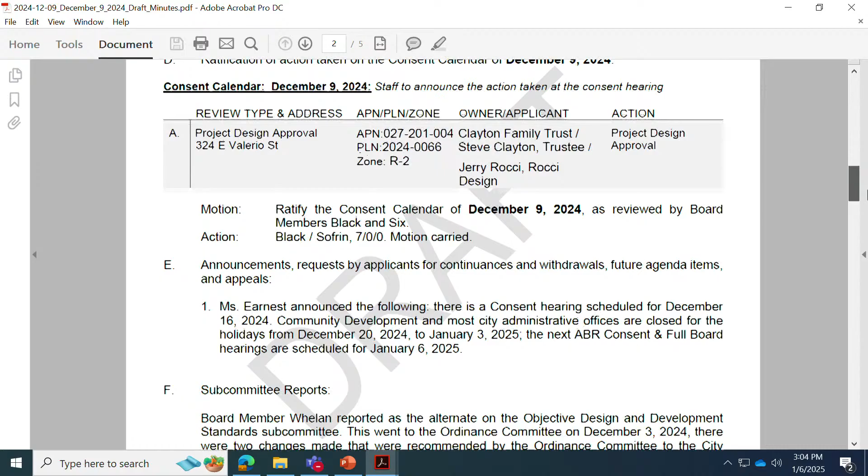I make a motion to approve. Second. Any discussion? Okay, let's take a vote. Chair Anderson? Yes. Board Member Anderson? Yes. Board Member Black? Yes. Board Member Six? Yes. Board Member Sofrin? Yes. Motion passes. Let's move on to item E, approval of the minutes from the consent meeting on December 9th.

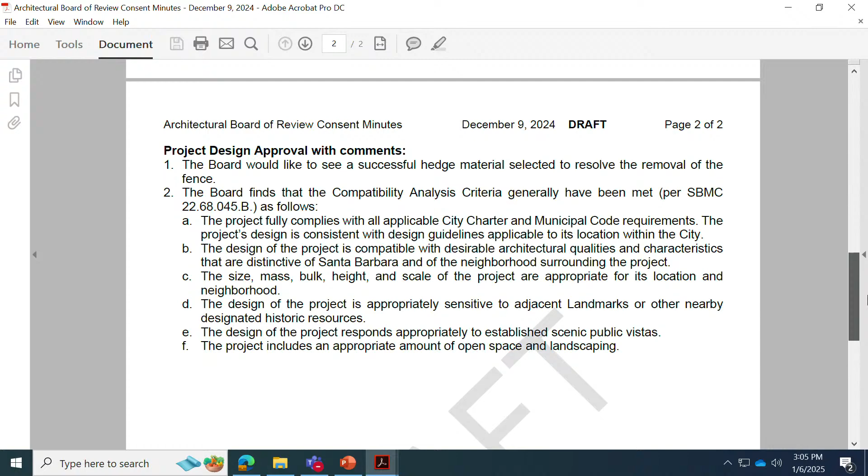Motion to approve. Second. Okay, let's take a vote. Chair Anderson? Yes. Board Member Anderson? Yes. Board Member Black? Yes. Board Member Six? Yes. Board Member Sofrin? Yes. Motion passes.

Item F, ratification of action item on the consent calendar of December 16th. Thank you, Chair Anderson. The items reviewed on December 16th were item A, 1298 Las Positas Road, which was continued indefinitely to consent, and item B, 2941 State Street, which received project design approval and final approval with the condition that the 4 windows with the 2 flanking casements shall have an internal middle mullion.

Okay, do we have a motion for ratification? Motion to approve. Second. Let's take a vote for the ratification. Chair Anderson? Yes. Board Member Anderson? Yes. Board Member Black? Yes. Board Member Six? Yes. Board Member Sofrin? Yes. Motion passes. Item G, any announcements, requests by applicants for continuances and withdrawals, future agenda items, or appeals?

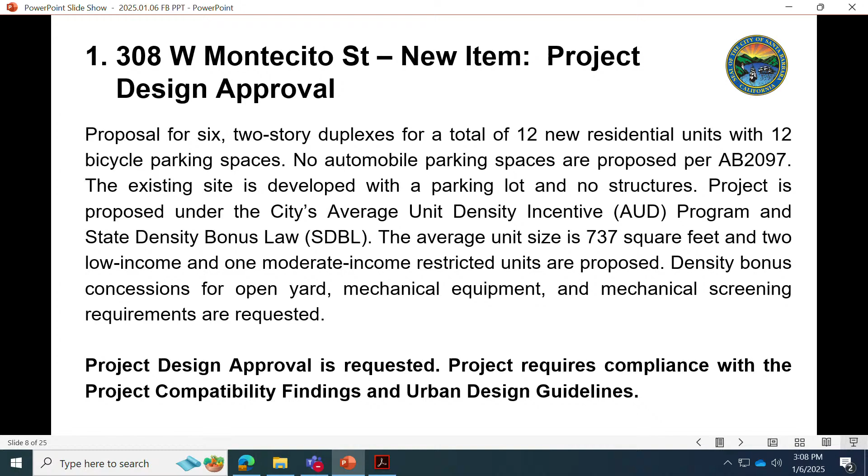Is the applicant here? A few staff comments before the applicant presents and introduces themselves. I'd also like to add a few things after we receive in-person public comment. But before the presentation, I'd just like to clarify that the project is here for project design approval. It was deemed complete, so it's ready for project design approval today.

There was a previous project approved at this site and the neighboring site, 302 and 308 West Montecito, approved by ABR and the Planning Commission for a 32-unit hotel. That application was allowed to remain active while the applicant explored housing on these 2 sites. But with them moving forward with these housing applications, they will be required to withdraw that application for the hotel project. I just wanted to clarify that. After the presentation and public comment, I can clarify the questions received in the public comment letter. Thank you.

Any questions from the board before we get going? Yeah, I have a question for the staff.

Given the makeup of this particular project and its roof, which is hipped roofs, is there any minimum requirement for area to be available for photovoltaic systems?

I will look into that during the presentation and answer that after.

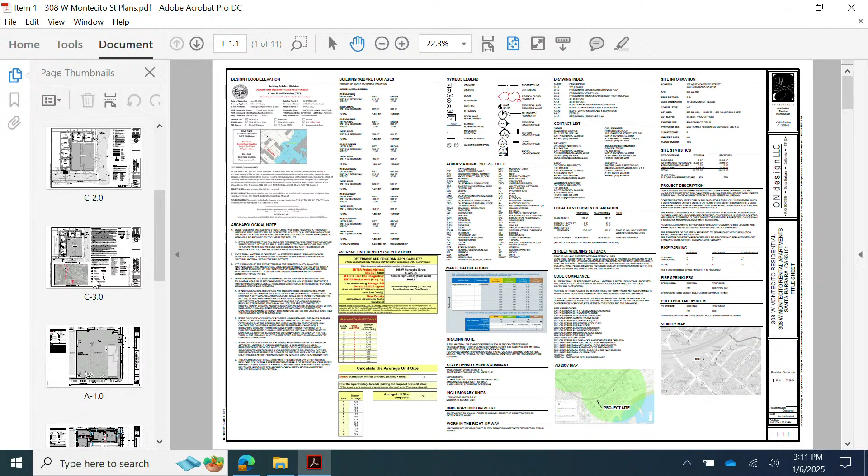So the subject property is 308 West Montecito. It is approximately a 10,000 square foot lot, in the shape of an L with frontages on West Montecito Street and on Bath Street. This corner property is 302 West Montecito Street, so that's not a part of this project.

Currently it's just developed as a parking lot. There are a few existing trees - a eucalyptus tree over here on this portion of the property, some palm trees along the Montecito Street frontage, and an existing street tree along the Bath Street frontage. And if you'll recall from the previous application, there are a few encroachments from the property to the north.

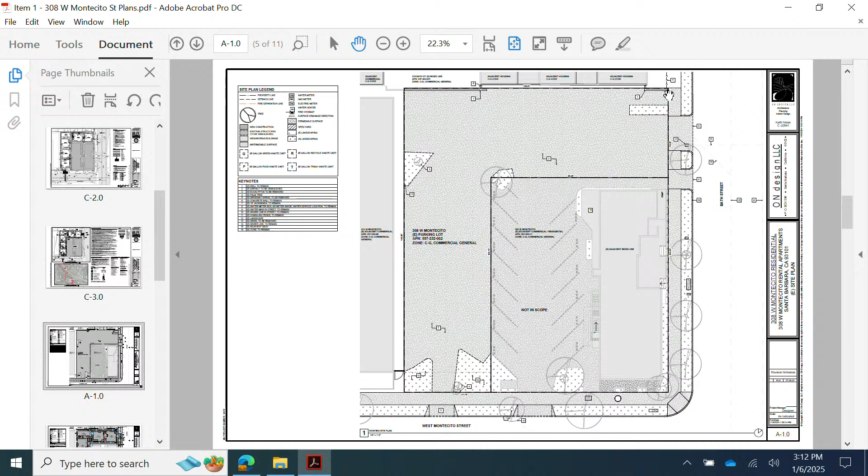Particularly, there are two wall elements and their dry utilities located on the subject property, not included in an easement area. So we are proposing to clear the site with the exception of those encroachments along the northerly property line and construct...

Did I hit something? I don't think I did. Sort of. There we go. I know.

They construct 6 duplexes. I would say the inspiration for this site was when we look at the neighborhood context, it's mostly 1 or 2 story structures. The structure to the north is 1 story. The structure to the west is also 1 story.

I'll point out on 302 West Montecito Street, there are 2 special accessory dwelling units proposed, so those are single story. 302 itself is 2 story. If you'll recall, across the street, 311 West Montecito, which was approved, that's 2 story. The commercial center next to it is also 2 story.

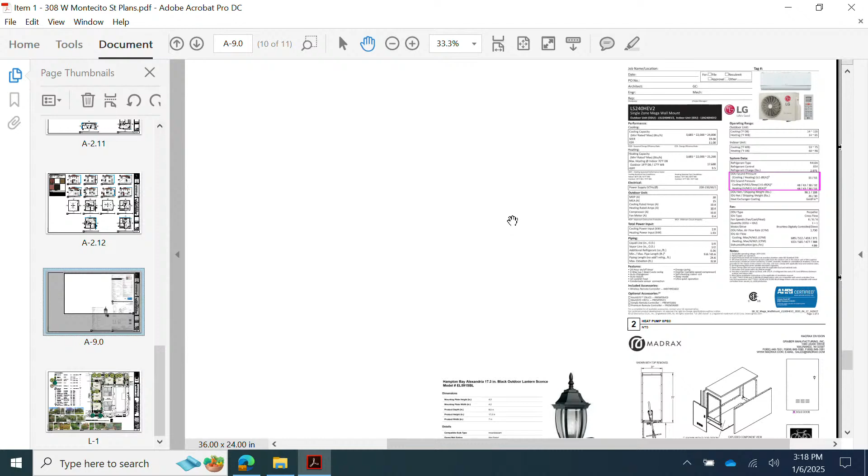Moving on, this is a spec sheet of what the bike lockers are, but they're inset in, so they're not prominent on the architecture. The proposed color is a bronze color to match the trim color on the architecture. And this is the light fixture proposed, found near each entry.

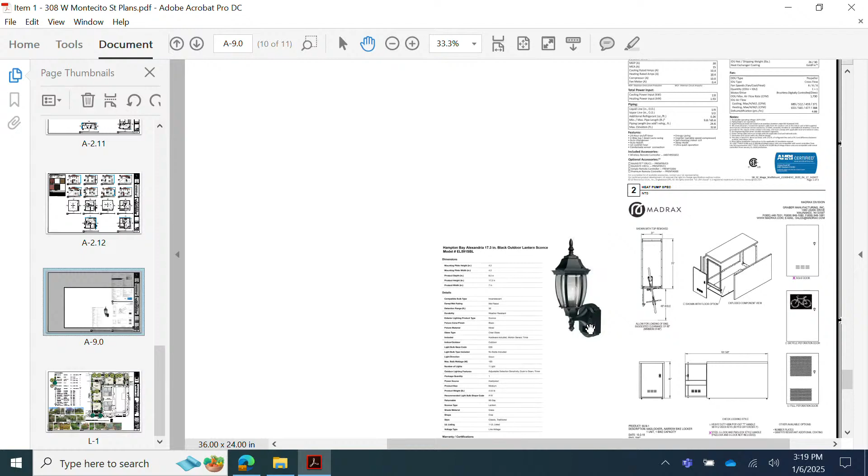Landscape-wise, it's a coastal palette, generally between the trees or between the buildings due to limited space. There are king palms proposed in an irregular pattern, with the exception of along the northerly property line, to comply with the city's highway ordinance. Those are Tristania trees to provide more canopy and screening and filtering of noise and air. In certain areas around the buildings, there are espalier calliandras proposed to provide some more vertical landscaping around the buildings.

Just scroll over the photos of the plant.

That's the general project. I don't know if we have photos that we can look at for the context.

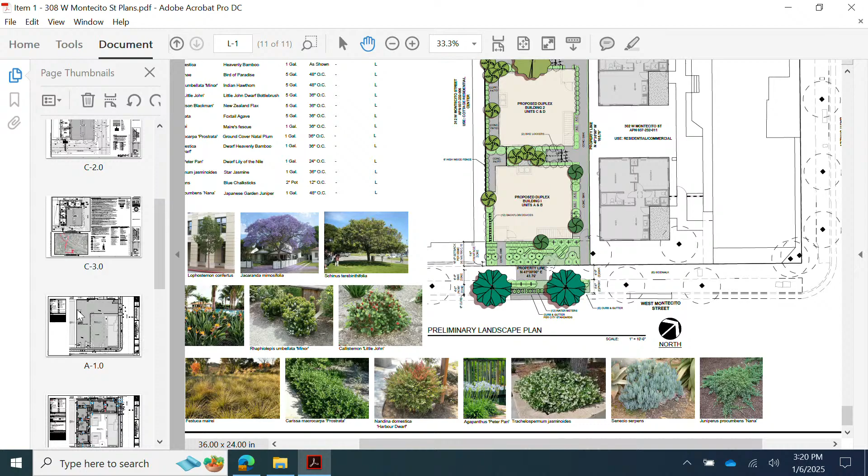There are some technical difficulties on the staff computer, so we're going to need to restart it so I can regain access on my end to pull up those photos. But if you want to, should we do that now? Okay, let's see. Oh, no. That's not working. Can you go back?

Oh wait, I think it's back. Can you switch? Can you switch to this stuff?

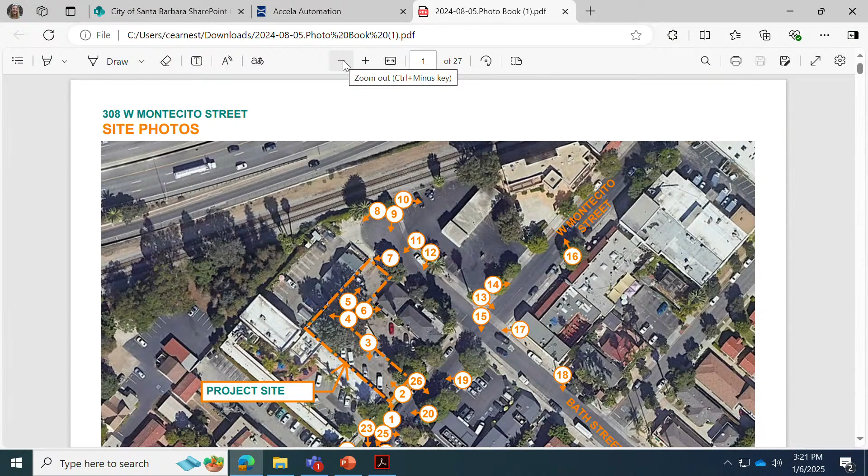To the west, this is I believe Cottage Hospital, kind of an annex, I don't know if it's a rehab facility per se, but some kind of ancillary medical use. Yes, to the applicant, I have them pulled up on my screen and can scroll through. So the first few photos are the parking lot site itself.

Slow down. So that's the adjacent property to the west. That's the adjacent property to the northwest. They have a 2-story structure at that corner of the property. That's looking down the property towards Bath Street.

That is looking back towards the existing building on 302 West Montecito Street. That is looking at the neighbor to the north. That's looking back towards the property's frontage on Bath Street with the 302 building. Across Bath Street is a car wash facility.

Looking back at the property on Bath. 302 West Montecito Street from Bath Street. That is the southeast corner, the intersection of Montecito and Bath. Further looking down easterly on Montecito Street.

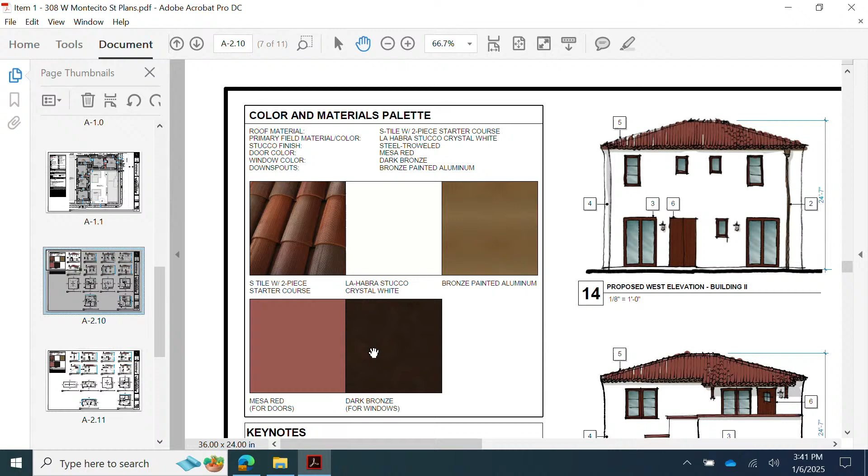And then just one quick last question. I think you're proposing a Brazilian pepper on Bath Street. Is that a city requirement? It was on the city's list. Is it on the list, or is the city telling you to use it? It was prescribed for that particular street. I understand.

Okay, and so in terms of the site circulation itself, because this is kind of a corner lot, what is driving it? There's a directionality to the stairs, the placement of the walk-up, the second floor access. What drives whether these units are rotated or mirrored?

So generally, it was for the second floor access that all had to be made on the common walkway, which, coming off of Montecito Street, is along the easterly property line. That's what drove those stairs being accessed from there. And then along the streets, we wanted the ground floor to have a direct connection to engage with the street, so those buildings were rotated differently than the ones further back, so the ground floor unit's walkway went directly to the street.

And you also mentioned an idea about open space, combining two of these pavilion units versus separating them. Correct, yeah. So the idea of not proposing a property line fence was to allow a bit more openness between the two properties, since it's quite tight as currently proposed. The idea of locating the two ADUs on 302 was that this common courtyard, which hasn't been designed, could be utilized between the two properties.

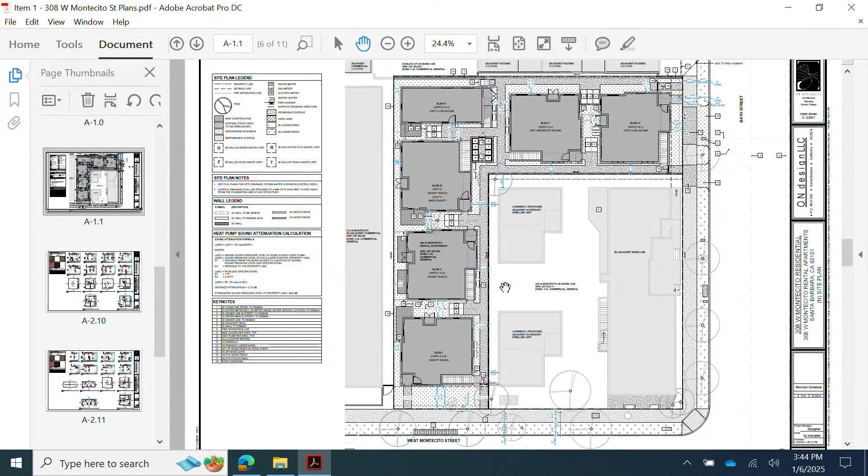Okay, that's all I have for now. Okay, I have a couple questions. Do you have the pavement material on your landscape plan? I believe it's just proposed currently as a natural gray concrete. Just concrete, okay.

Could you walk us through the adjacencies on buildings 5 and 6 on the north side, between your project and the northern property, as far as what's on the ground floor? Is that living space or bedrooms that face north? On this corner on both buildings, that's the dining room, and in the back corner, that's a bedroom. This one is just living space, kitchen, and dining room.

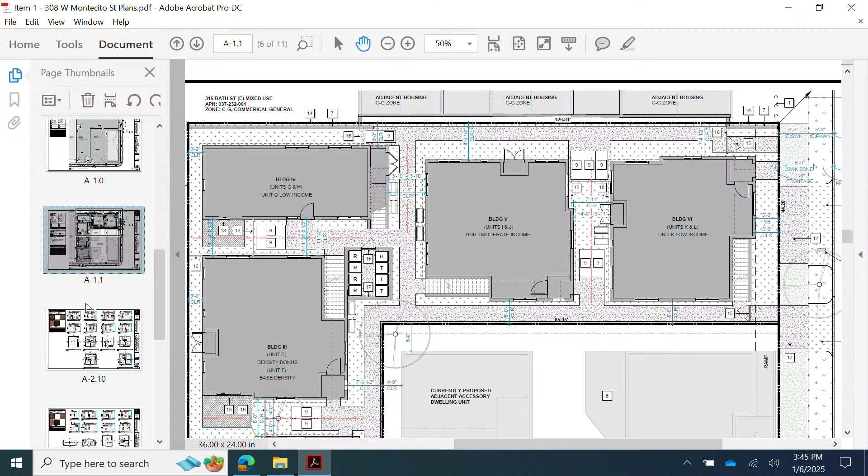I'll switch quickly to the floor plans. Do you know where the windows are on the neighbor property? I don't, we would have to plot those to respond to Bonnie's concern on that. Yes, you can see here, so the dining and kitchen living would be facing the neighbor.

Okay, those are my questions. Follow-up questions? Board member 6. Forgive me for showing up late, you may have covered this already, but I wanted to know more about the trash disposal, if that hasn't been discussed.

It's there in the center of the site, and it's been approved by MarBorg. But more than that, does MarBorg come to collect the bins, or are the bins taken to the street? It hasn't necessarily been covered. So the bins would have to be taken to the street, by the occupants or management. Not by MarBorg, yeah.

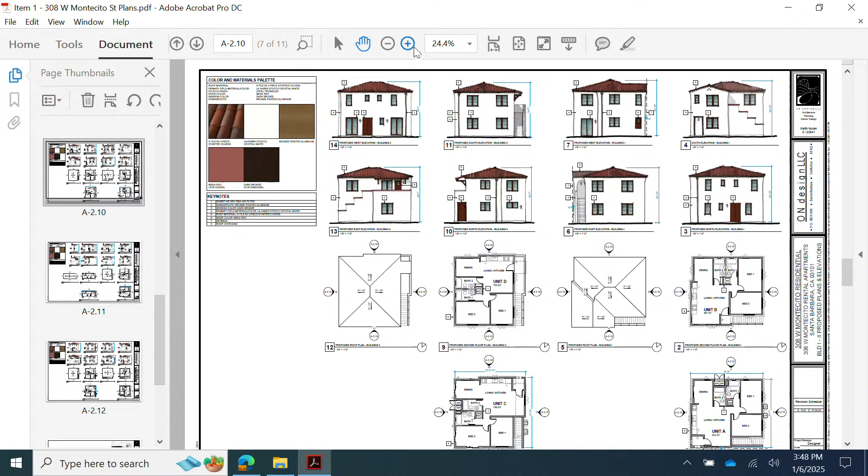A minor point, may be a drawing error, but on your image number 7, sheet A2.10 - the overhang over the front door doesn't appear to be consistent in the roof plan compared to the two elevations. I think that's just a drawing error.

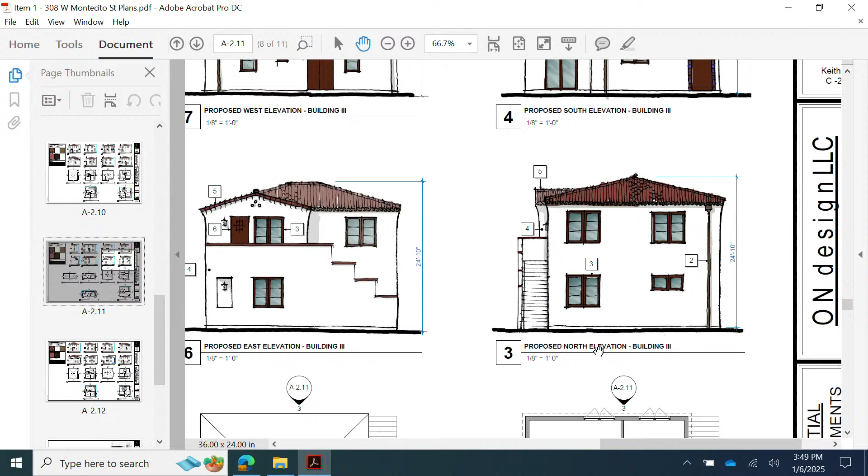You can clear that up. And then the other drawing error - I believe it's on image number 8, sheet A211, number 3, if you can zoom in on it. This implies that the pop-out is really where the entry door is, but at the top of the stair we're seeing a pony wall that would prohibit you from getting to the front door. I think it's just a drawing error. I would concur.

I think those are my only questions. Thank you, one follow-up, Chair Anderson. Let me explore a little further with you - can we get a site plan? If indeed these are owned by the same property, is there a way to meander the sidewalk so the property line is right on the sidewalk, to equalize the distance of planting along each side of the building, shared with the other buildings on 302? I would say that's a possibility. Okay, very good, thanks.

Any other questions? Let's move into comments. They're here for project design approval, and we have not seen it before, so this is the first time, so all comments are welcome. Board Member Anderson?

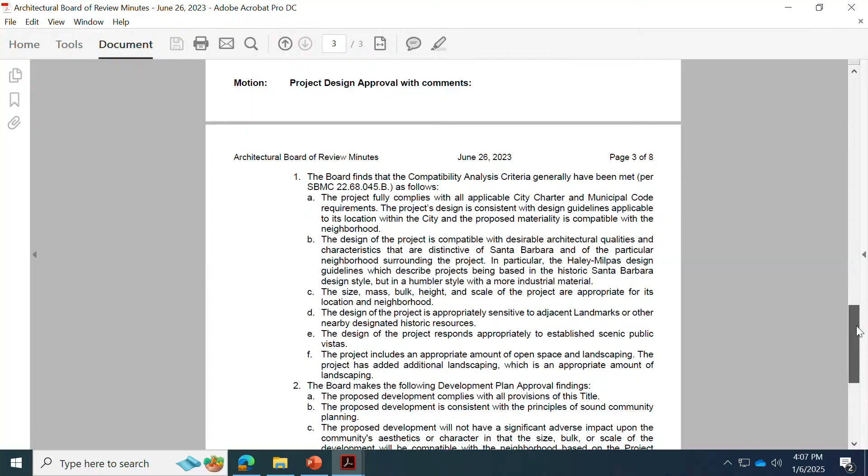Here are the minutes pulled up from the June 26, 2023 meeting, and it looks like just the project compatibility findings were made and the development plan findings were made, along with individual comments from the board members who voted no on the motion.

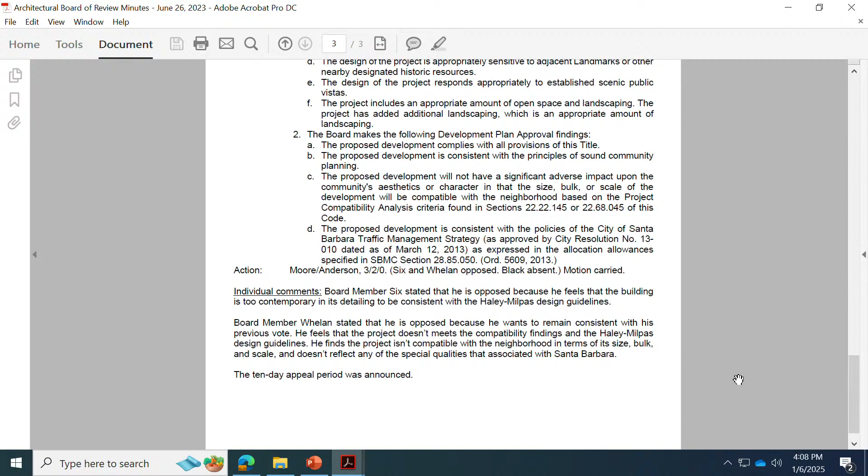If you can introduce yourself - you have 15 minutes to run us through the changes and updates. I'm Kevin Dumaine, project architect with Design Arc Architects. Derek Eichelberger with Arcadia Studio, landscape architect.

So as I mentioned, this is in progress - we've been working through the details in the development of this design, and it's been getting refined, taking on all the different code issues. Where we mostly have some concerns we wanted to run by you prior to final was with the Laguna Street elevation.

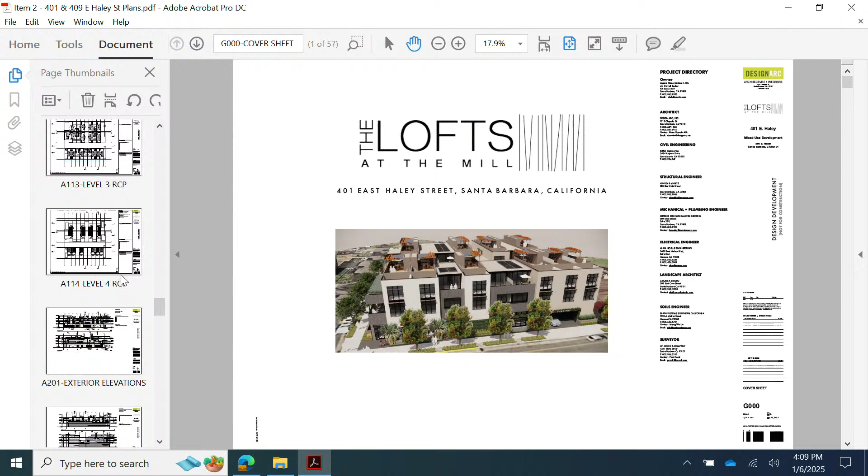So way down past all the G sheets, we will get to - here we are. Oops, too far. So the Laguna Street elevation is this one right here. If I can, how do I zoom in? You can click and then scroll. Plus at the top - yeah, I'm a Mac. Oh, okay, yeah, there's always that way. That's the easy one. Thanks, Richard.

So you've got our 2D elevation here, but the big concern on this elevation is we needed to bring the elevator up to the third floor, so we created a lobby and made this glass element. We've maintained the horizontality of the original design but added this piece and brought up the elevator shaft. I did bring a few comparative before-and-after images to help you guys - it's always good. I'll give one down here, one here, one over there.

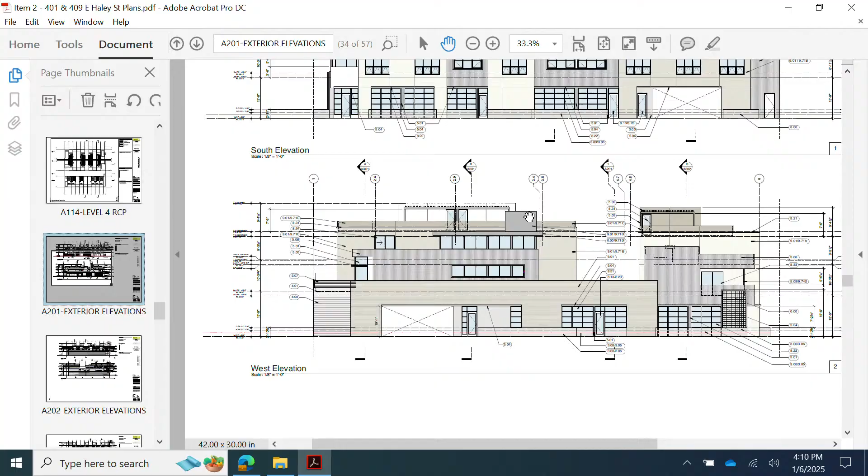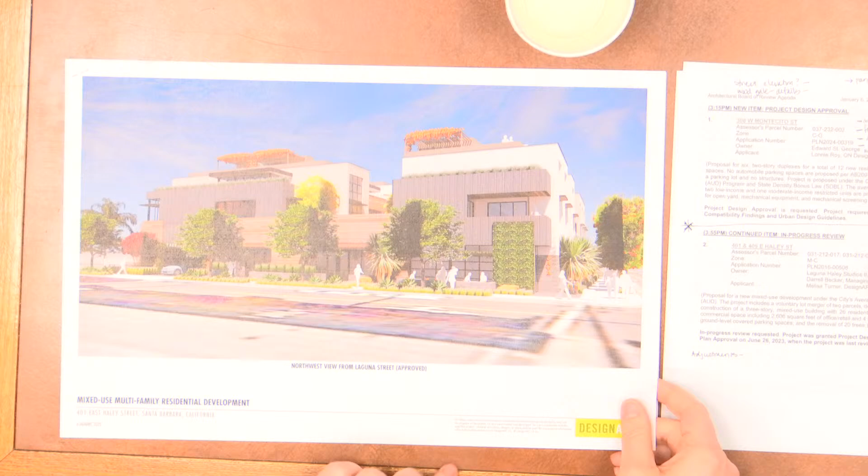So the first sheet you got was the previously approved design - can you zoom in on the picture on the table, please? Get the eye from the sky. Okay, so on this image you're seeing the previously approved design, and if we flip to the next page, you can see the design that we've submitted today here.

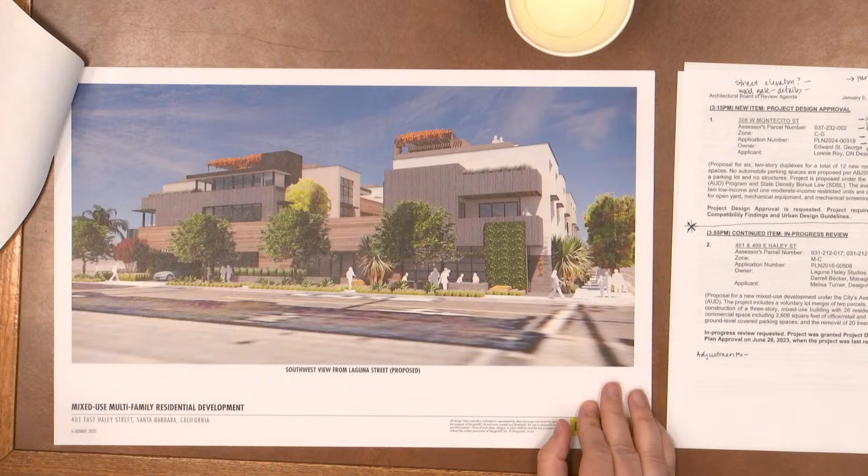On the left side you see the north wing of the project where we've had to bring the elevator up to the third floor - we've pushed out this elevator lobby but maintained the horizontality of the second floor element. This was, after multiple studies, what we thought would be the cleanest, most compatible way of doing it with minimal impact on the massing. So that was one piece we wanted to present.

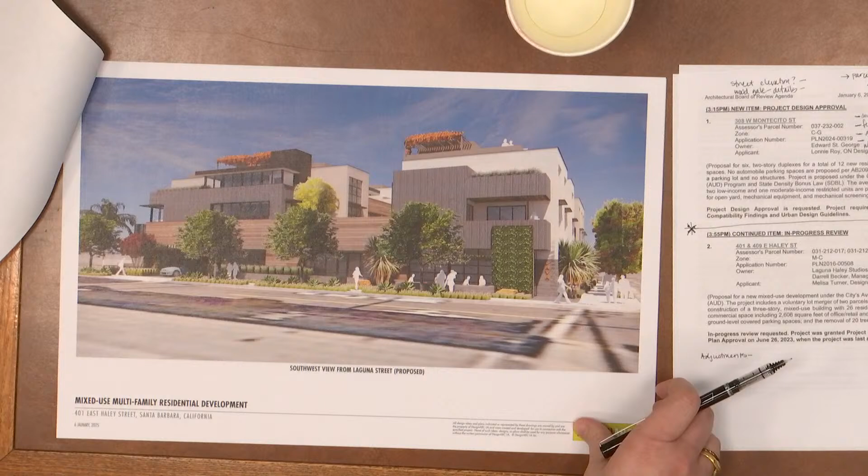Then the other portion is the front wing, to the right. On that piece, you can see there's a little bump to the corrugated metal portion of the building - use the cursor, can I use a pen on your drawing? Go to the next page. Yeah, so this portion here, we need to have the ability to bring that up a little bit higher.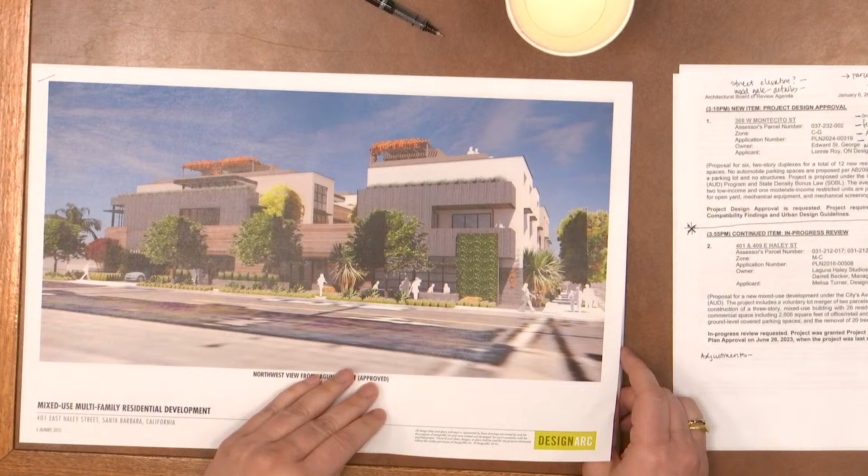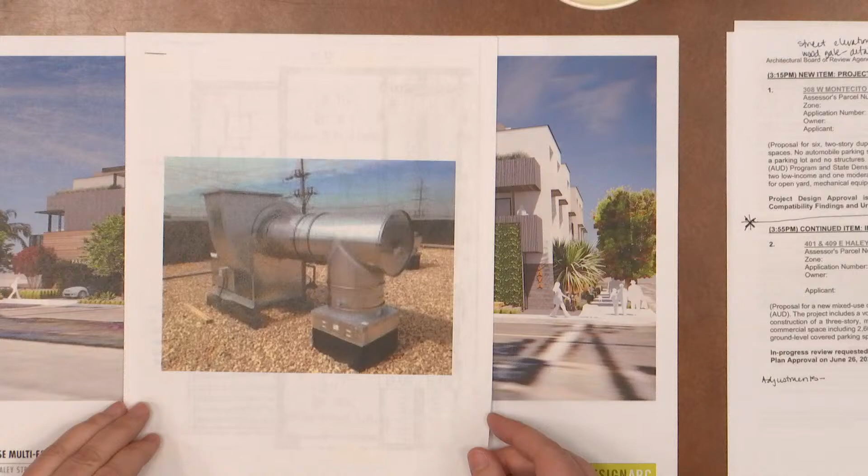The explanation for that is in this next package. The goal is to keep a little coffee shop operation in that corner space, and unfortunately the coffee shop needs a hood, and the hoods regrettably get rather large. So we've studied quite a few different options for how to accommodate this on that roof, because that roof's not all that wide. The strategy we've come up with - maybe go to the section, that little section there.

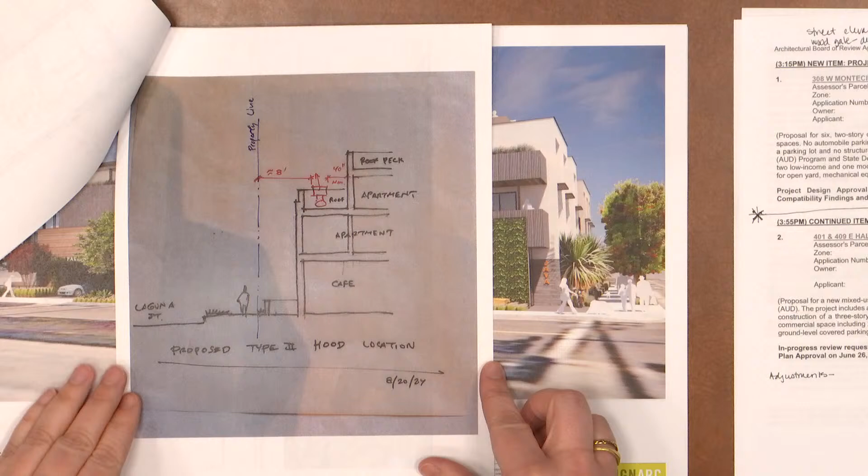If we can raise that parapet in that area a little bit higher, then just the very top of this vent will stick slightly above the parapet. So the height of the vent or the parapet will ultimately be directly related to the height of the vent. We just don't have that information for now. We weren't here for the concept.

By doing this, we can meet all the required code separations from the wall. We can, for the most part, keep it out of sight from the street, and we'll meet the ventilation requirements.

We looked at other studies taking it up even higher to the upper roofs, but then you're adding quite a bit more massing to the building, and that was not a favorable direction for the project. So we felt this was a more discreet solution for screening the vents.

This is the existing. Correct.

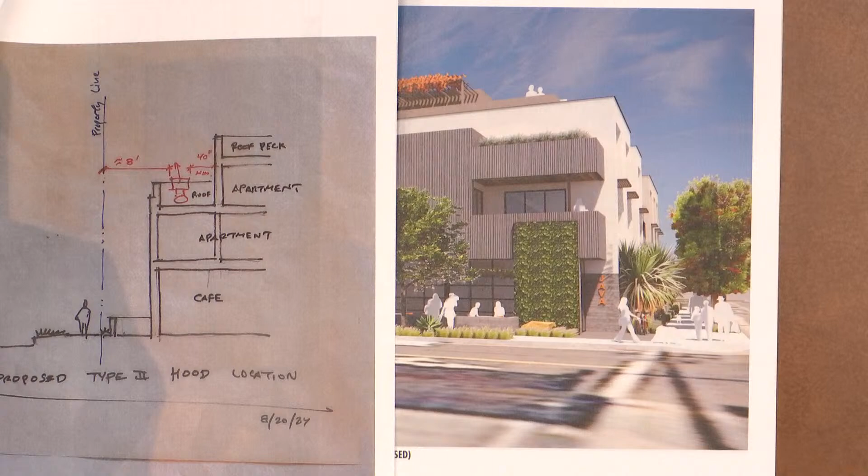So those are really our big two pieces here that we wanted to present to you today. The rest of the set is just really in progress. You see that we're kind of refining it and developing it, solving little issues here and there. And that's pretty much what I wanted to focus on today.

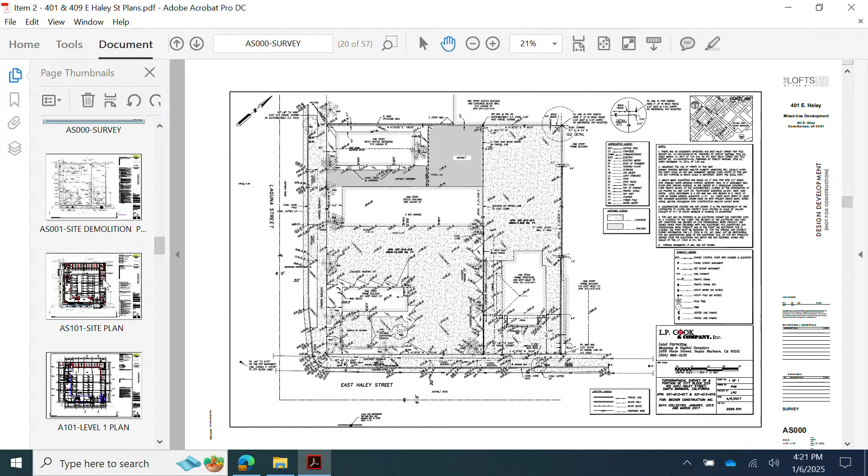Okay. Or maybe the L1 plan or something. Yeah. There we go. I think I just saw it in there. There you go. It's your A101 maybe? Okay, well, so

Programmatically, it is a mixed use. What was driving, what is the concept of this building, I guess, architecturally? I can see you've got the horizontal banding, the facade cladding that seems to suggest a horizontality to the building, but is there either a particular style or architectural kind of partie behind this? Keep in mind that our client owns the mill across the street, so there's a little bit of continuity of that. And also along Haley Street, you have this industrial overlay design district, which is even being incorporated into the objective design standards in that map.

So there is this precedent along Haley Street. And so the project is kind of working with that tradition, and then we've developed a sort of modern design. We've broken up the massing, it steps back at the third floor. It utilizes roof decks rather than building massing all the way up to the height limit. And it's essentially very efficient, but contemporized and then broken up into smaller masses, facades of an efficient AUD project, over parking.

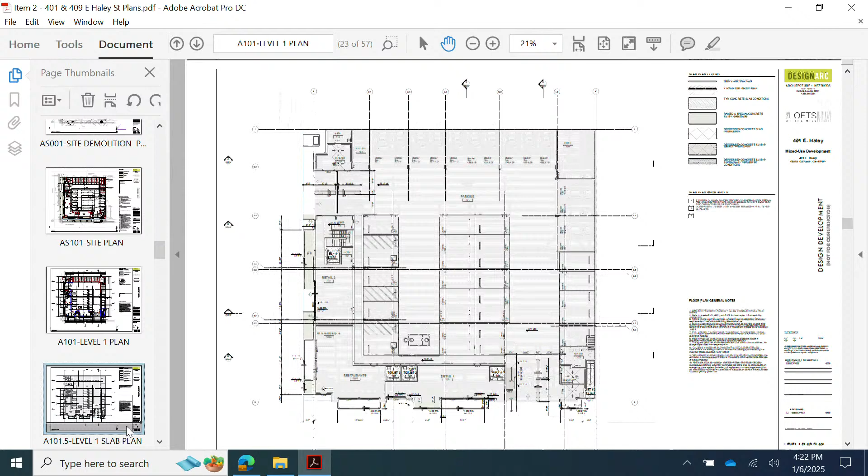Okay, can you flip to the A101 so I can see the units? So it looks like a lot of these open directly onto the street in terms of the fenestration. I think, is there a reason why some of the openings are so large? It does feel like it's kind of disproportionate to the...

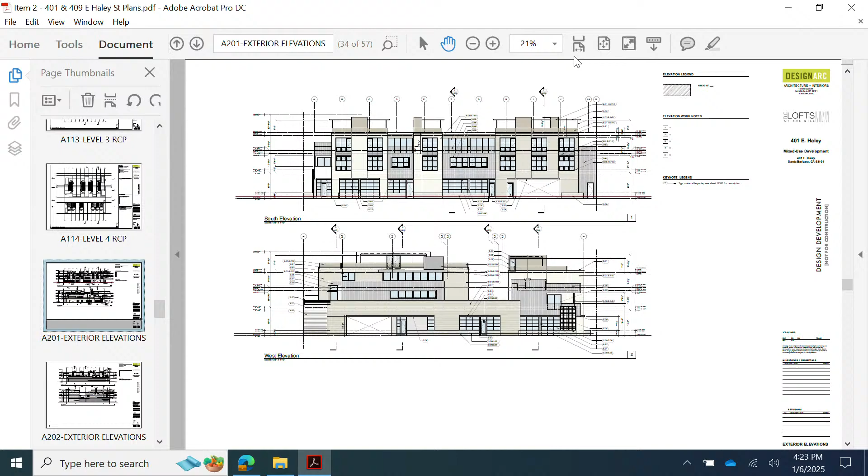Reminder, the project has design approval. Yeah, I mean, this has been through multiple meetings here already, it's had the project design approval. But the idea with these large openings is to give you kind of the double order and break down this, creating a double order to these larger openings, which unite the second and the third floors. It's just an architectural device.

Board Member Anderson, if you have any further questions, I would focus them in on the changes from the plans that received PDA to the plans that are in front of you today. I think those questions are more concept level review, so let's focus our questions on just the changes since its last review. Thank you. All right, I don't have any more questions, so.

Board Member Soffren, were you here for this one? Okay, no questions. Okay, Board Member Black? No questions. Vice Chair Whalen?

Yes, I do have a couple of questions. Ms. Saffel, if you could use your omniscient powers to turn on the overhead camera. City TV, please zoom in on the pictures on the table, please.

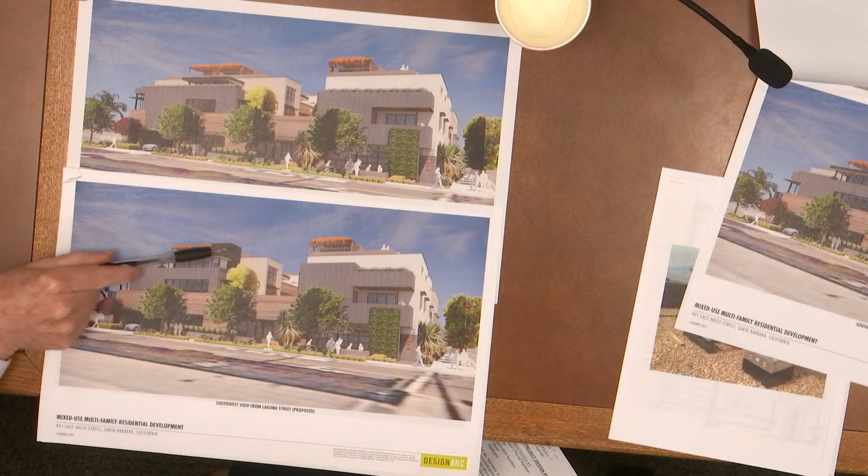Mr. Dumaine, if I understand you correctly, the necessity for the elevator tower has pushed this out further towards Laguna Street? That's the lobby you speak of? And you show this is the elevator overrun.

And just to make sure Mr. Eichelberger earns his salary here, what are these delightful orange plants? They're proposed as Pyrostegia, the flame vine. Yes, very good.

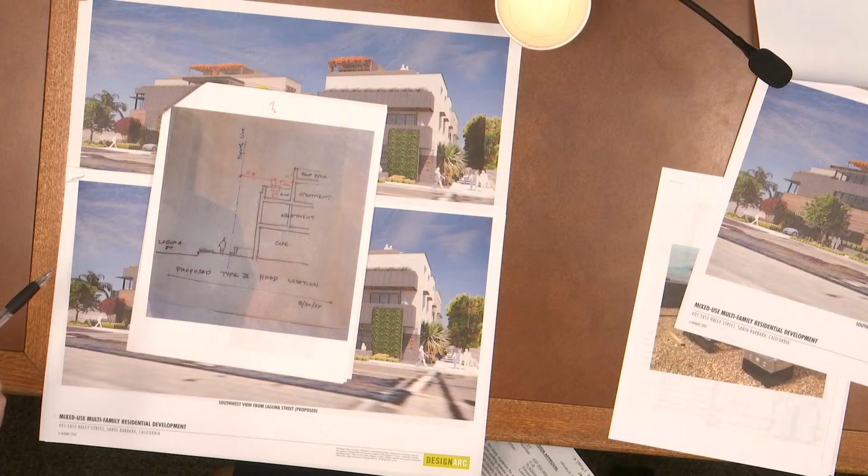Back to Mr. Dumaine. On this sketch, are you showing us the proposed addition and this little winglet here on top? That was actually a slightly earlier version, but it'll be taller than the existing parapet by about 3 feet, depending. Does this reflect the change? Yes, it does. But there's no step. No step, but the need for the higher parapet at this location. Right, understood. It's a diagram that's a little bit loose.

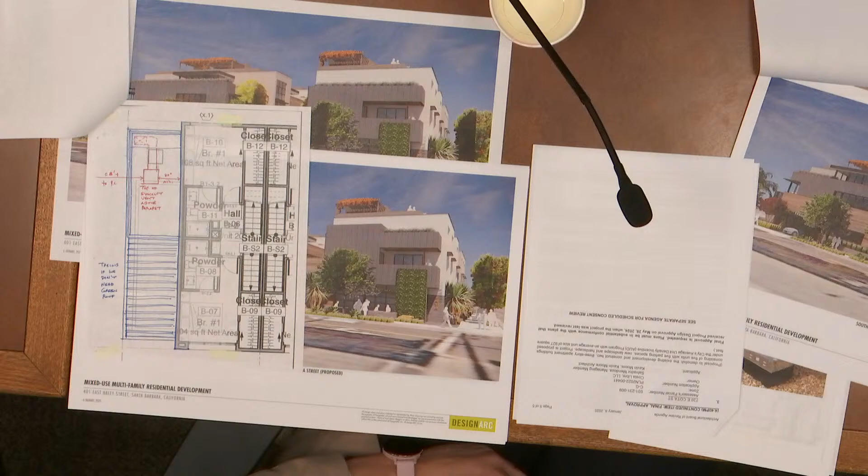So the key thing is that the top of the vent can be slightly above the parapet, to meet those clearances. Been there, done that. Yeah, this horizontal is the minimum, is what you're saying. We want to be able to get around it, you do need service space. I don't have a precise size on that. Can't be any narrower, I don't think.

And therefore change of material. When we come back, we'll have more specific detail on that. Okay, very good. And you're still proposing the same materials and so forth? Yes. Okay, thank you.

Okay, and just to follow up, we can keep this up here. So the other renderings are looking—oh, I see, sorry, okay—looking the other direction. Yes.

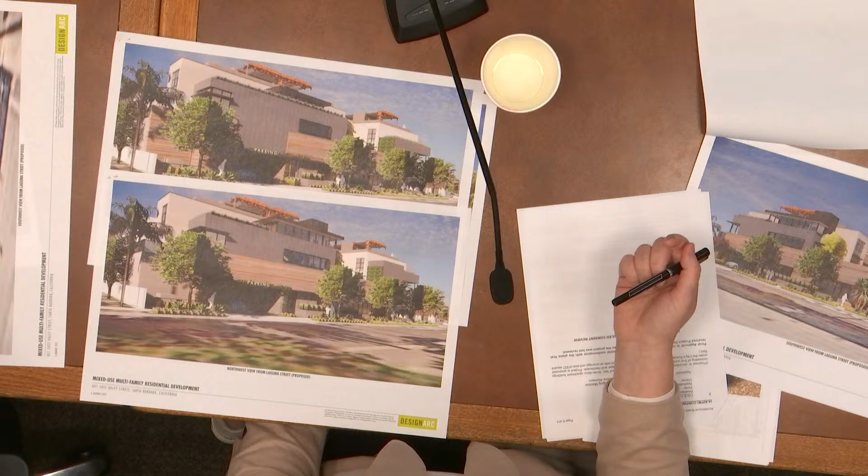This will tie on to Board Member Six's comment because currently the green wall stops where the existing parapet was, and now your new parapet extends above. So maybe just look at the interaction. Or I guess the question would be, would you continue the green wall all the way up? Would you stop it there? How would you integrate that with the new parapet?

Actually, I think we're going to lose that green wall. By the time you get the ADA ramp up there on the paseo, because we have to drop 18 inches, there is no space really left for a planter. So I don't think I can even make that work.

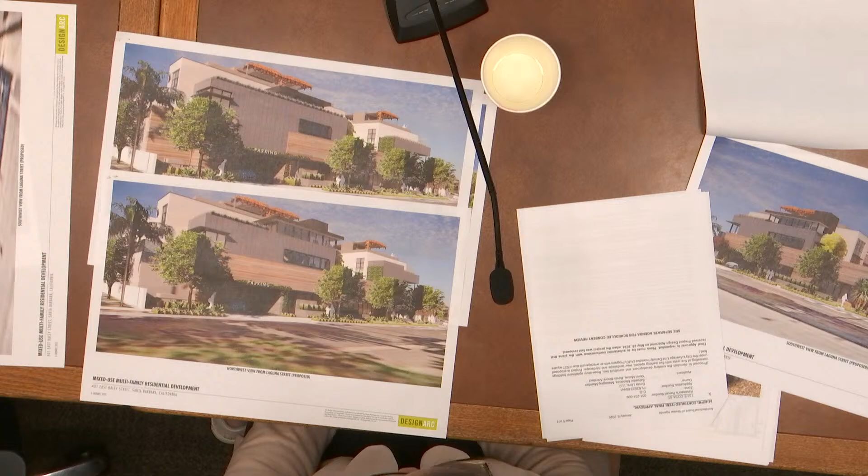Can we look at that plan? Do you have that courtyard plan? Yeah.

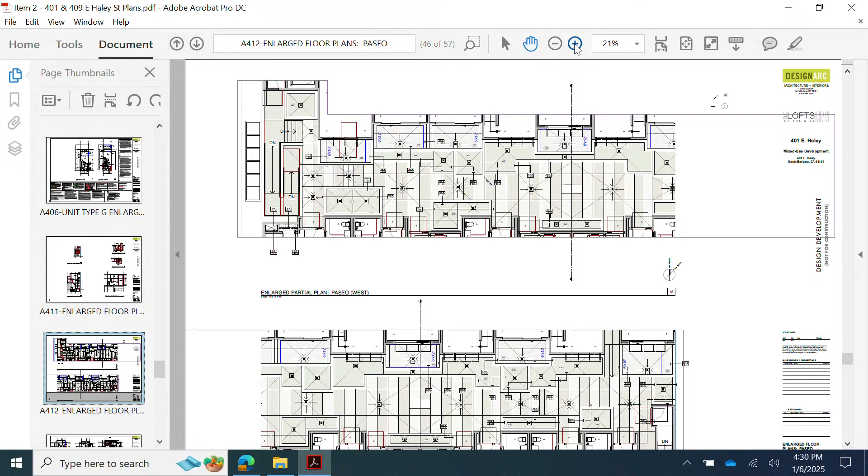Well, we've got about 1.5 feet here. That could all work. Let's do it. Okay, the vine's back. The vine is in. Okay, wow, scared me there. Okay, that's my only question. Oh no, I'm sorry.

Do you have a section through the elevator and the, whatever room that is, I forgot—atrium, atrium lobby. Yeah, it's in progress here. That's all good. I was just curious if there's any space between your corrugated wall and the glass, or if it's directly on top.

Zoom in one more time here. Not much at all. Okay, yeah, we're bringing up the corrugation, stepping back. Actually, this is slightly out of date. The glazing will come down too where we do the step.

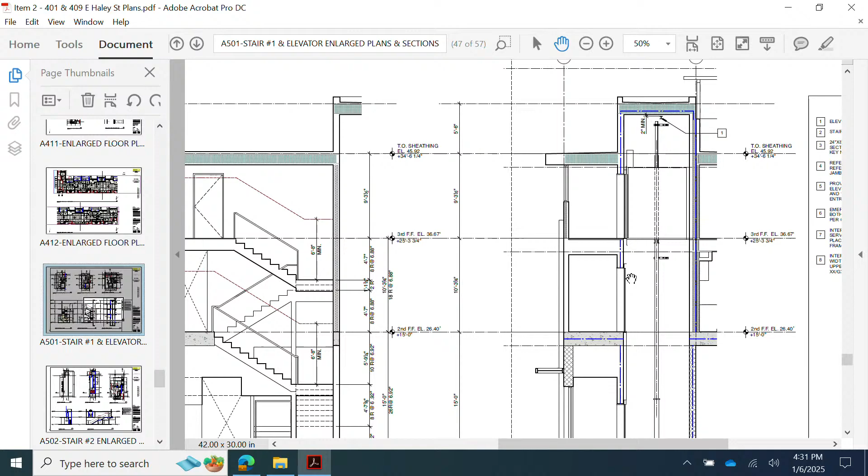Okay, any follow-up questions? Just one, if we can look at the plan of that atrium, or whatever you call it, lobby. Get it.

There you are. Well, it's short of where I wanted to go. It returns right at column line 3, or does it extend out for some reason? Well, the stairs are a real pretzel, and it just kind of barely fits.

The extent vertical up and down, that sheet of glass wall, when does it return to the building? Oh, just beyond the cropping here.

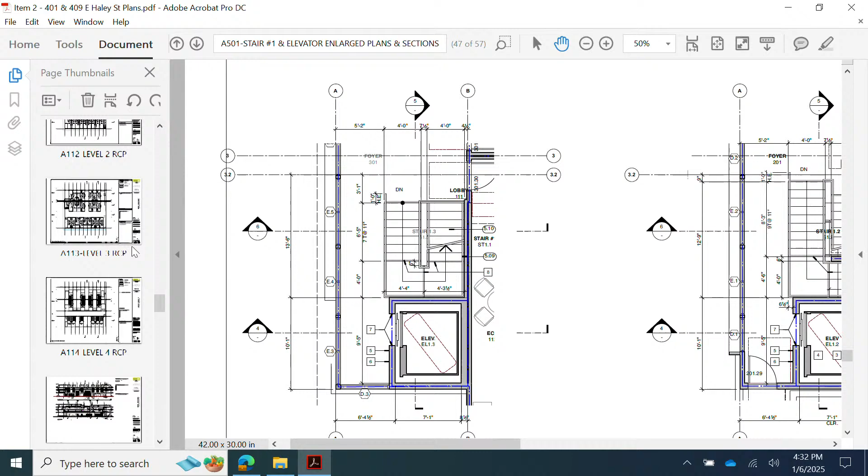So we have a, incorporates the other door. I'll find you the third floor plan. Oh, there's another door there. Okay, got it. Bingo. All right, thank you.

Well, can you do another notch out of the atrium there to reduce the length of the atrium glass at the street by 4 feet? Is that possible, or is that just fussy? Do you understand what I'm saying? Yeah, you create a little more of a zigzag circulation inside that space if we do that.

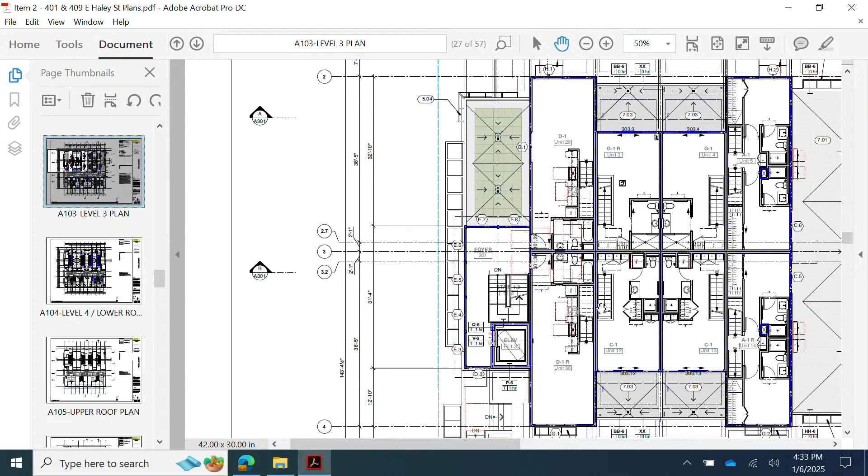It's only serving one unit. Anyway, it's not a big deal. I'll drop it.

Okay, let's go to comments in progress review, so comments on what has changed. Board Member 6: Well, I don't have any problems with the minor revisions. I prefer to have a change of material at that increased parapet to get your horizontality back. But I'm still going to vote no because of my previous objections to the contemporariness of this building.

Vice Chair Whalen: No comments. Board Member Black: No comments as well. Board Member Sofrin: Good solution. I feel like it's in keeping with what we've already approved. I think it's great. Fine-tuning the detailing at the parapet, where the hood is, changing the material, is a good solution.

We'll make a motion for indefinite continuance back to the full board for final approval. That would be great if you feel that the project is ready for that. Okay, yeah, we feel that the board finds that the plans are in conformance with the project design approval that was previously granted.

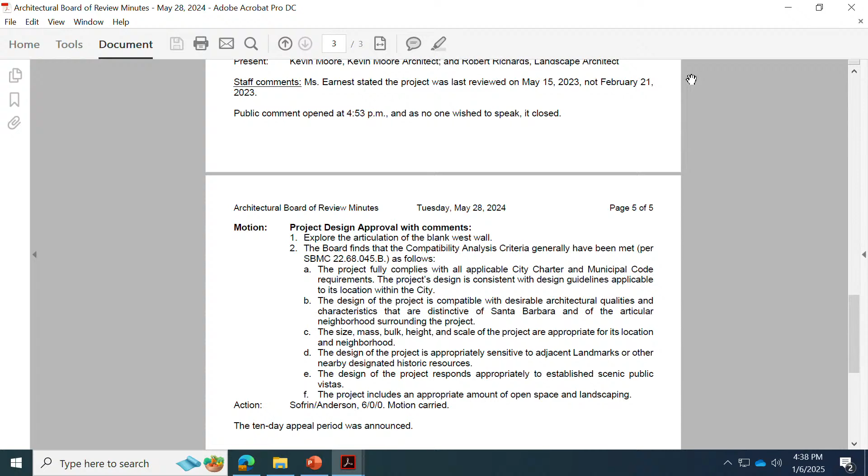Okay, so really what we've been doing is just coordinating with structural, civil, landscape, all the various folks, and no substantive changes to the design, heights, massing, bulk, scale, etc. It's the same project, and we'll just be finessing grading, etc., and landscape.

A couple things to point out on our site plan. There we go. Just, I know it's important. This is Nopal Street up here, and it's sort of the lesser of the two streets, traffic-wise. And we have East Cota Street here and Nopal Street here.

We've tucked away all of the metering and fire check device back here, as well as backflow devices for water, domestic water, irrigation, etc., all kind of tucked back here behind our little site wall. That site wall is 42 inches tall. You can see we had to stagger it out to get that backflow to fit within that area.

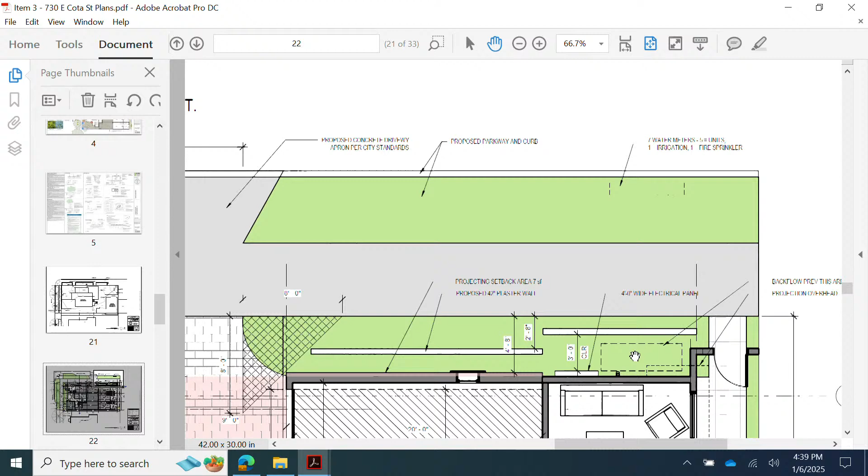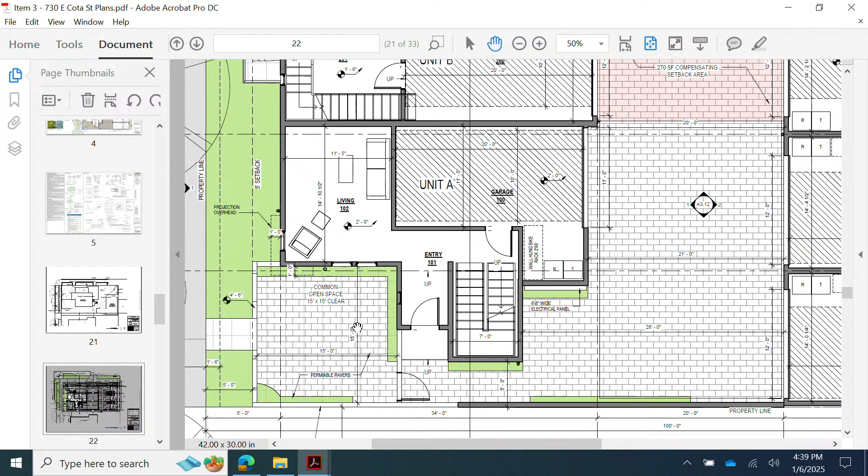The only other real change has been with some grading to get the stormwater to work. So we had to add one riser at the entry point of this unit. Otherwise, everything is pretty much the same.

Currently there's a giant tree on the neighboring property right here, and some other smaller trees that cover this area. The adjacent property, while being the front building and a historic structure, has a large area in the rear that could potentially be developed, and there's currently a big storage shed there that will need to be relocated during construction. This adjacent property owner has asked our client to replace that in kind.

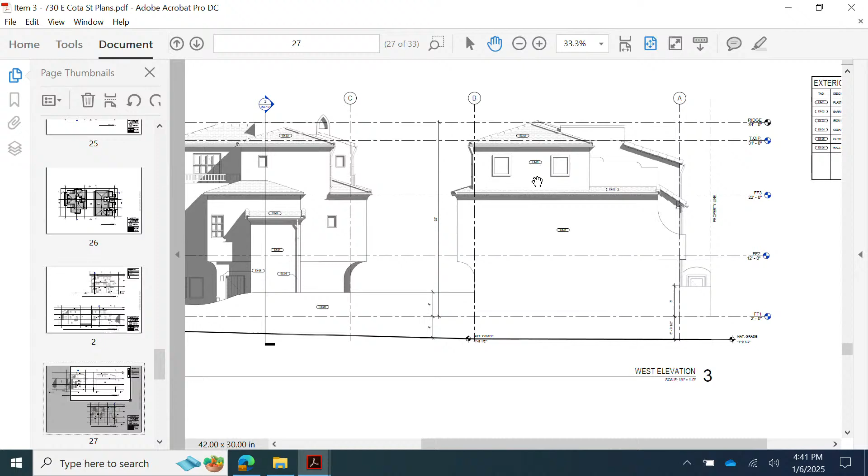So that is that. I'll hand it over to Robert, and he can take you through the landscape updates.

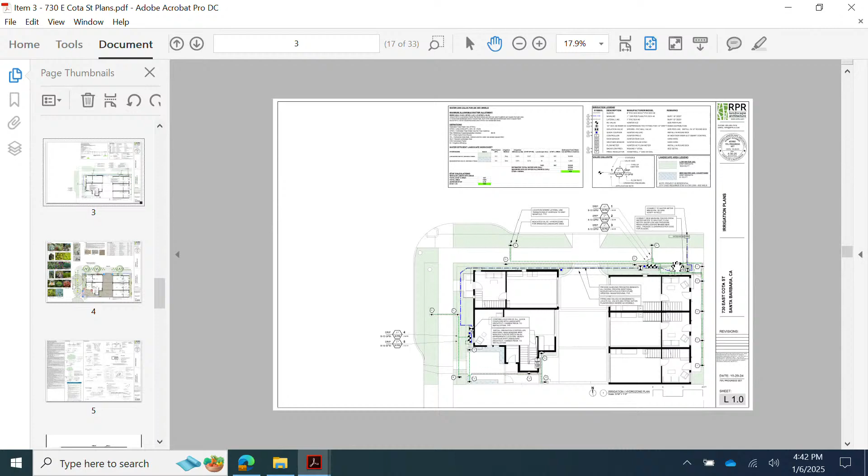I think the comments were pretty positive regarding the landscape at the last meeting, so what I did was take our concept drawing and further develop it. Here's our irrigation system — it's all drip irrigated. You've got a backflow preventer hidden up behind the wall, like Kevin was describing.

We've got permeable pavers in the driveway area, using two different colored permeable pavers to differentiate between the driveway and the more pedestrian-oriented courtyard. In the driveway area we've got some banding using the charcoal color, and for the pedestrian areas we've got the more tan-colored pavers. Then there's some poured concrete specified to match a similar color tone as the pedestrian courtyard.

Through coordination with the arborist, we got 3 jacaranda trees going out in the parkway, underplanted with cotoneaster. There's some existing trees in this parkway that are going to remain. Most of the planters on this property are very constrained due to the nature of the development, so I've got a hardy plant list of stuff that I find will fit into these challenging areas. I can walk you through the specific planting if you like, but you're probably familiar with it enough — already reviewed it.

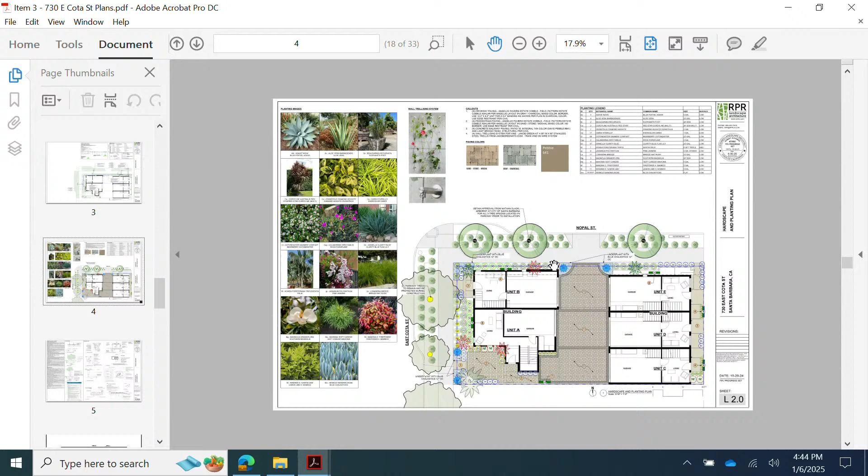Can you just run us through your details and light fixture? Sure.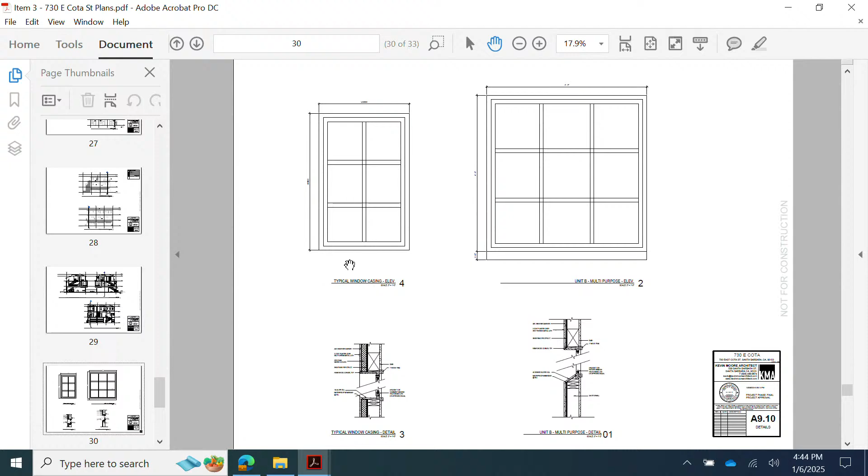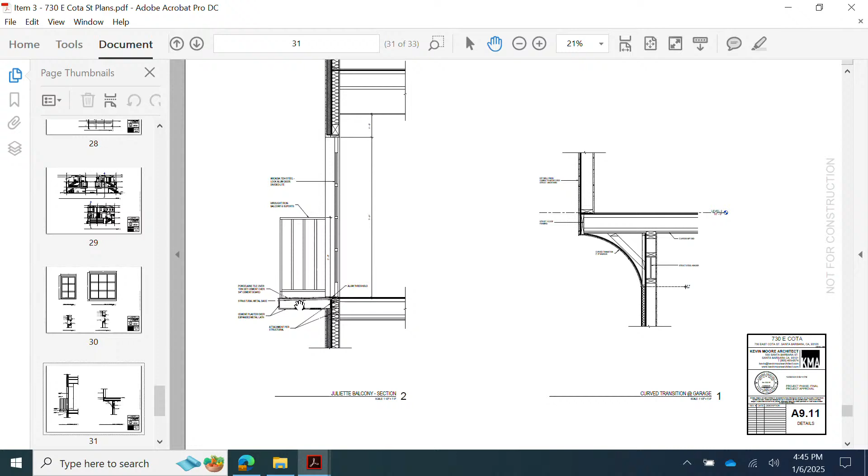A couple typical window details — we have more of a flat sill detail with a more square corner, and we have our sloped sill. Typically we have some of these kind of transition pieces throughout the project, so this is that radius there. Here's our little Juliette balcony.

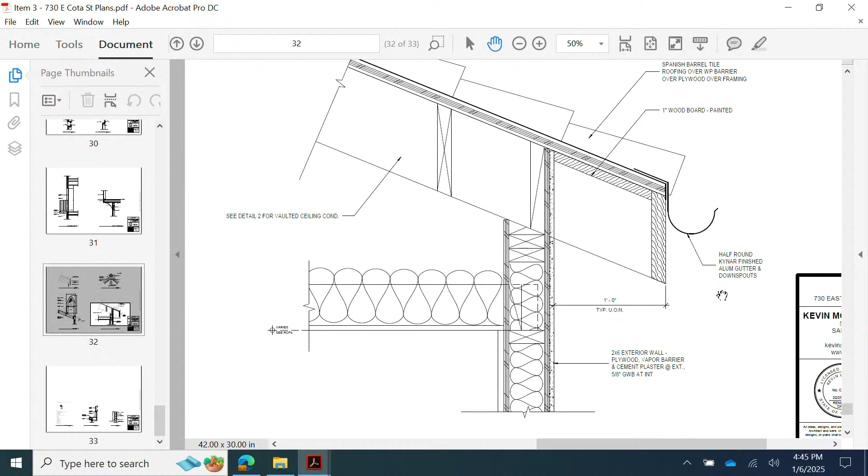We have a typical eave detail, half round aluminum gutter, painted kind of an oil-rubbed bronze color, and we have our faux chimney detail as well — kind of the typical things.

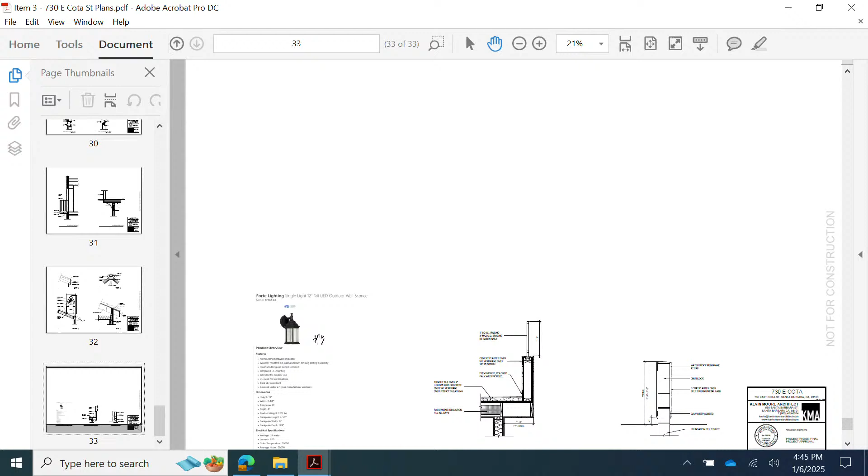Here's our typical sconce at the unit entryways, shielded at the top of the bulb, so it's an LED down fixture. The lens is up inside here, so the light is only directed down.

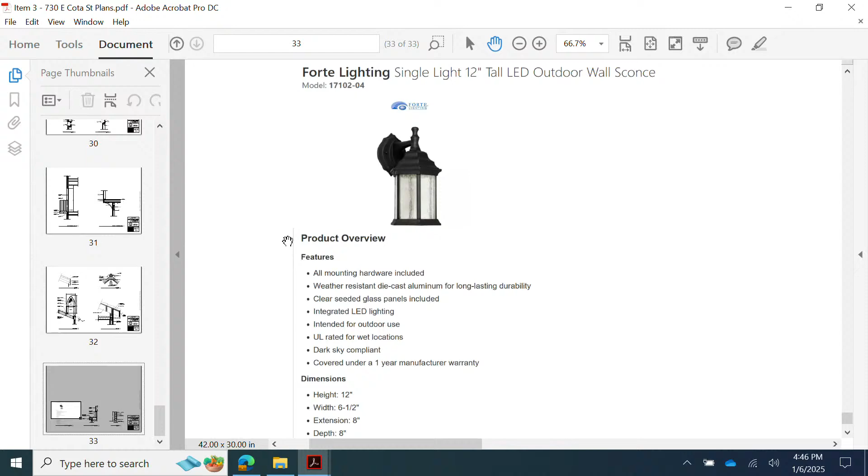We have our little half and half detail here with plaster wall and iron top, and our simple site wall here, CMU with plaster over the top. So fairly straightforward, typical Santa Barbara Mediterranean style detailing on this.

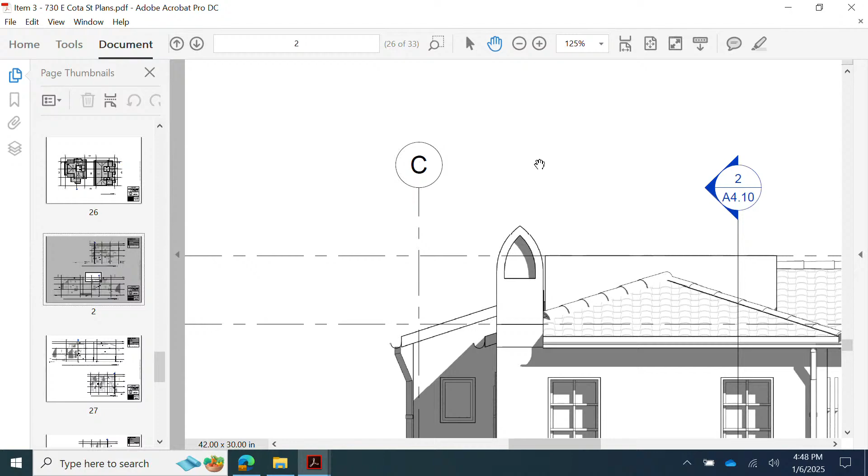Solid. Okay, it's not indicated anywhere, is it? If you could add that. And then,

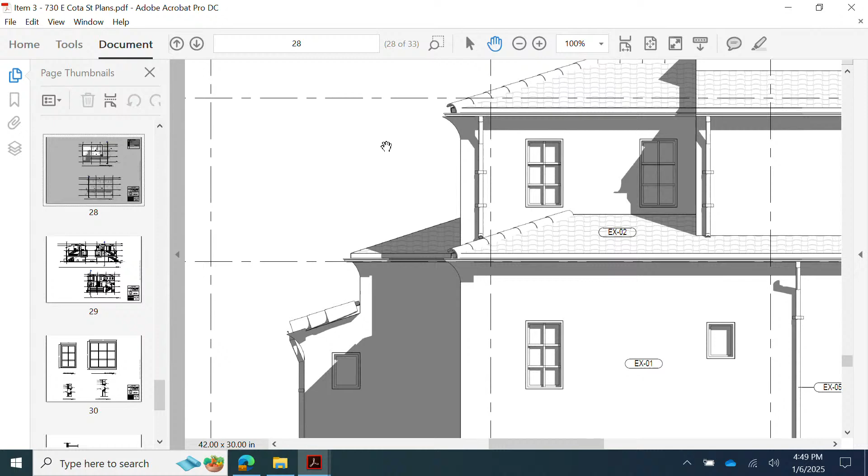I don't understand, can you go to the rakes and eaves detail? The elevations have a lot of transition between the rake and the eave, and I don't understand how you can go from a plastered, sculptured rake to a flat board eave, and then on the elevations there's scoop outs and so forth. Wouldn't it be better, Mr. Moore, to just do it all in a molding rather than introduce this?

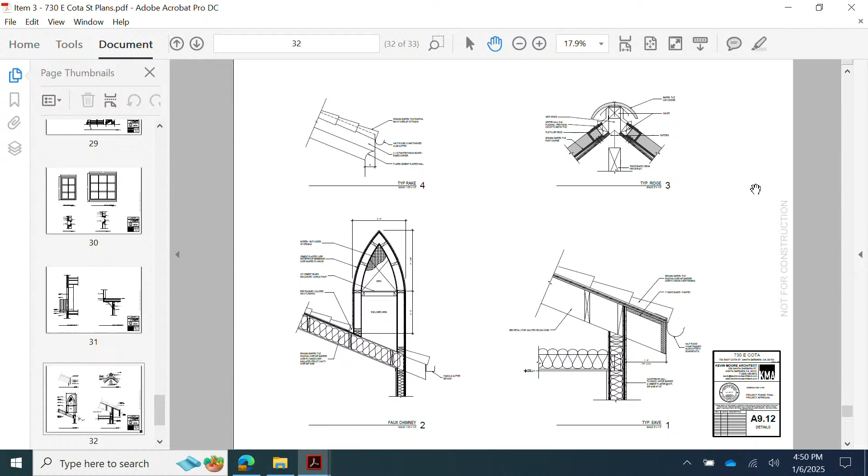I think so, I would agree with that. And there are different sizes of molding on the elevations, so. Yes. Could you see to that? Yes, I don't think it would hold us up, but I think that is the intent, is that we would have that radius molding to come out here. And then you can do your transition to your rakes much more easily, and so forth. Yes. Okay, that was my only question.

Vice Chair Whalen? One small question. The site walls that disguise the equipment on Nopal, we didn't see an elevation of those, but they have the same sort of wiggle top character that the others do. They do. Right here. Very good. That's the only question, thank you.

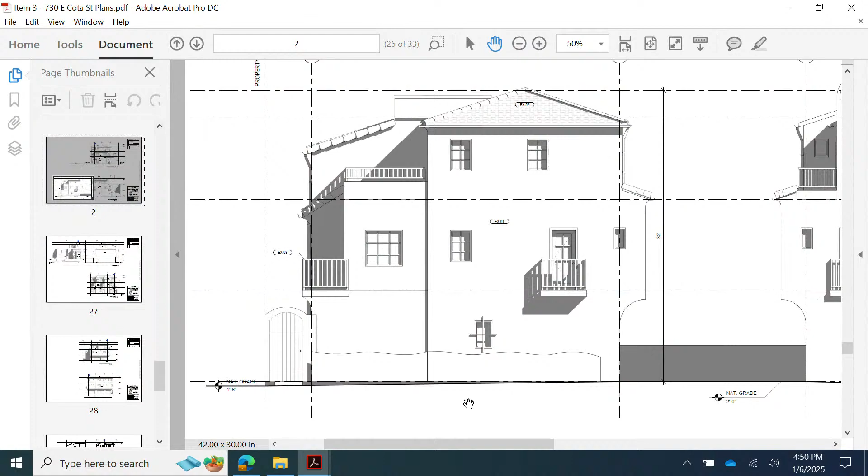Board Member Black? Just a quick observation. I thought I saw magnolia on your street tree for Nopal, is that not right, or is it jacaranda, did I just misread your schedule? It doesn't matter to me, but I'm just curious. It was originally indicated as magnolia, but the arborist has asked that now it's going to be jacaranda to meet the low water use requirements for the city. So I put a note on here, whatever tree goes in there, the contractor has to get approval from the street tree arborist, and my understanding is now a jacaranda tree.

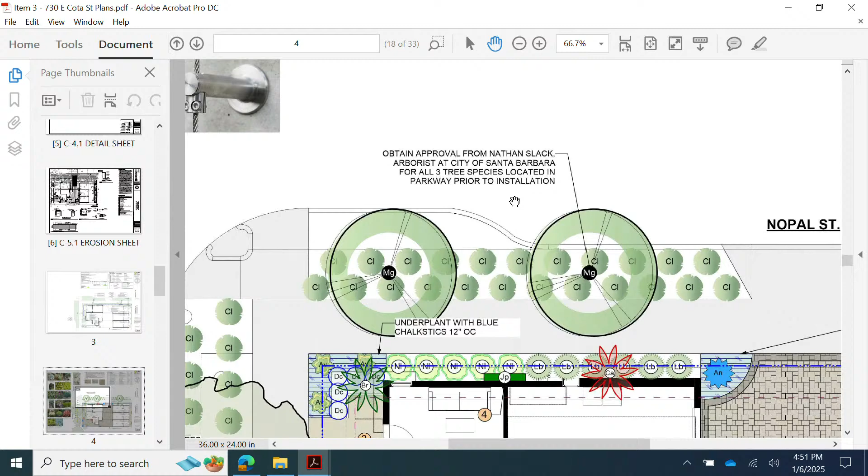You okay with that? It's a big tree. I agree, and I discussed with Nathan whether it was appropriate to put 3 jacaranda trees there, and that's what he asked for, so I can't argue. Yeah, okay, just an observation. Does that seem like a lot? I don't think I would specify 3 jacaranda trees to go out there if I had the choice, but that was what he asked for.

All right, thank you. Board Member Sofferin? No questions. Board Member Anderson, have you reviewed everything? No questions. Okay, I don't have any questions, so comments are here for final.